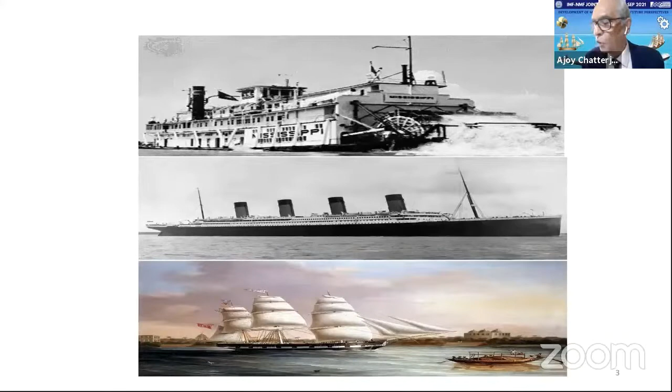In 1912, a much larger ocean ship, the Selandia, was launched. The performance of diesel engines was progressively improved. The comparison of thermal efficiency of these early engines with current operation, when thermal efficiency has risen to values approaching 55% for slow speed engines. The use of heavy fuel first started after the Second World War for use in marine diesel engines and it has become the standard fuel for the majority of seagoing ships today. There are advantages and disadvantages, obviously, of burning heavy fuel.

So, recently, local and international legislation has begun to be formulated, and the focus is moving to more expensive, lighter marine fuels and the use of dual fuel engines. With these engines, different grades of fuel are burned depending upon the prevailing requirements within the emission zones. In recent years, increasing oil prices have prompted interest in alternative propulsion options, changes in fuels for merchant ships. Typical of these have been the burning of LNG in reciprocating engines, wind-assisted propulsion, ducted propellers, energy-saving appendages, and interest in nuclear power as well.

Today, the steam turbine has largely given way to the diesel engine. This transition happened relatively quickly and coincided with the breakthrough of turbocharging and heavy fuel burning in slow-speed diesel engines, which gave these engines both power and the fuel economy to become more efficient than steam turbine propulsion. Consequently, steam turbines are normally only found today in nuclear-powered ships and submarines, as well as some LNG ships. Although in this latter case, they are also giving way to reciprocating machinery.

In the merchant shipping sector, the general demise of steam plant has in turn led to a shortage of steam plant operators. Developments with cruise technology have led to the use of diesel-electric propulsion arrangements. This is due to the efforts to achieve low noise and vibration signatures, similar to steam turbine ships, combined with enhanced operational efficiency that is achievable with this mode of propulsion by utilizing trade-offs between propulsion and hotel loading.

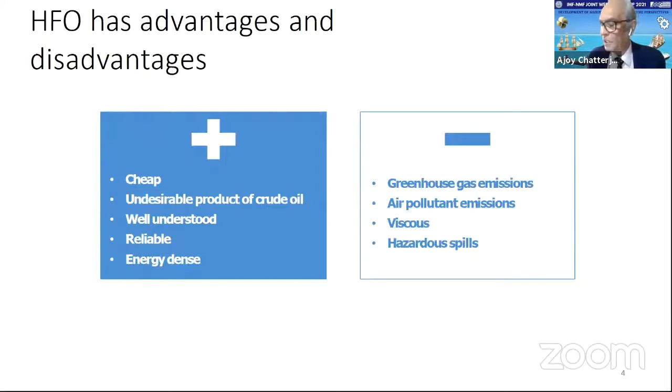Sir, just one second, sir. I think because you're turning your head, probably that is why the audio is going up and down. So maybe if you can just face the screen, that may be better for the audio if you can manage that, sir. Yeah. Can you hear now? Like, we can hear you when you're facing the screen, but when you're turning your head to the side, that is the time the audio is affected. I'll try to do it better this time.

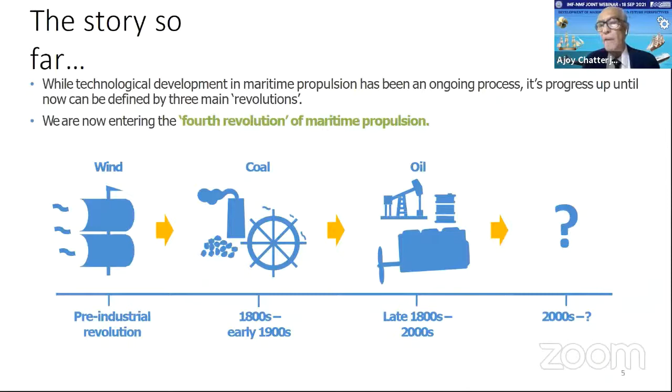So what are the short-term options? Shipping is vital to the world economy. It is a critical part of international import-export markets and supports the global distribution of goods. As for all industries, concerns about climate change require the reduction of greenhouse gas emissions from the shipping sector. This entails higher fuel prices for lower sulfur fuels.

The diesel engine is currently the most widespread of marine prime movers. It is a well understood technology and a reliable form of marine propulsion and auxiliary power generation, with engine manufacturers' well established repair and spare parts networks around the world.

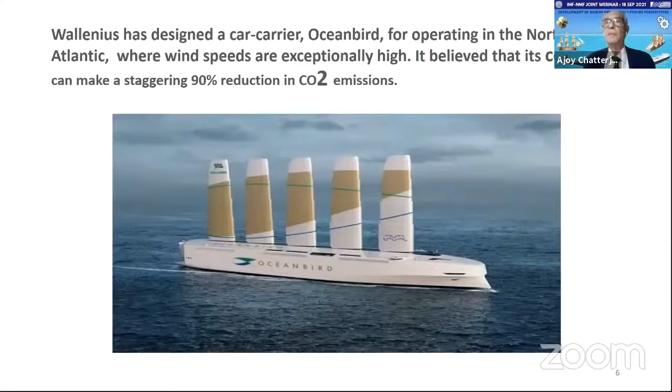So what has IMO done? What must ships do? The mandatory requirements. IMO has agreed to include a new chapter on energy efficiency in MARPOL Annex 6 and adopted mandatory energy efficiency regulations for ships called the Energy Efficiency Design Index, attained EEDI, for new ships, including a Ship Energy Efficiency Management Plan, known as SEEMP, for all ships.

In 2016, IMO adopted the mandatory IMO data collection system, DCS, for ships to collect and report fuel oil consumption data for ships over 5,000 gross tons. The first calendar year data collection was completed in 2019 and submitted to the respective administrations. In 2020, the IMO 0.5% sulfur limit entered into force, cutting total sulfur oxide emissions from shipping by over 75%.

In June 2021, IMO adopted a short-term measure to reduce the carbon intensity of all ships by 40% by 2030 compared to 2008, rather ambitious however. They do this by requiring all ships now to calculate the Energy Efficiency Existing Ship Index, known as EEXI, and to establish their annual operational Carbon Intensity Indicator, CII, rating. In other words, ships get a rating of their energy efficiency, A, B, C, D, or E, where A is the best. A ship running on a low carbon fuel clearly gets a higher rating than one running on fossil fuels.

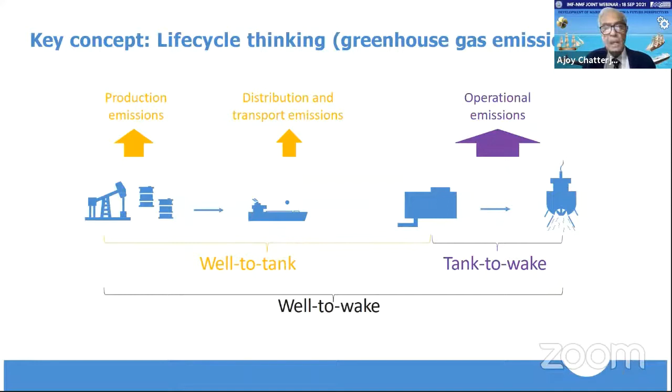Liquefied natural gas can be used in reciprocating engines, and it is a known technology, with classification society rules and fuel systems already in existence. Service experience with dual fuel and converted diesel engines, although limited at present, has been satisfactory, and currently LNG is considered cheaper than conventional fuels. LNG, while not free from harmful emissions, has benefits in terms of carbon dioxide, NOx, and SOx emissions, given that methane slip is avoided during combustion and fuel processes.

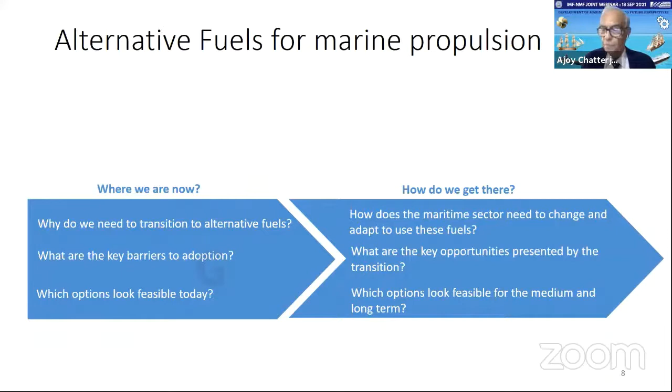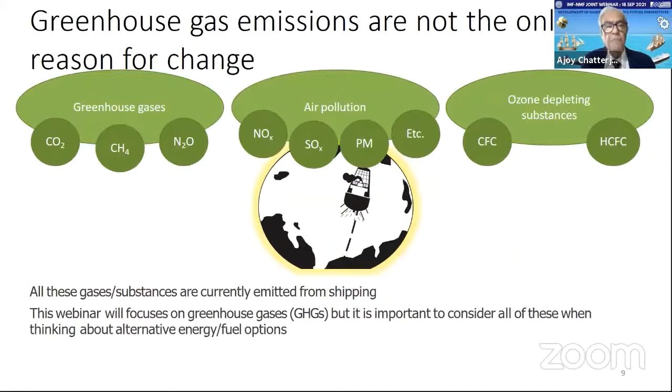The alternatives being very seriously considered are LNG, of course, LPG, methanol, biofuels, batteries, hydrogen, and ammonia. All these fuels or energy sources have a case for being an alternative option for shipping. Other options are ethanol, whose feedstock is already arranged for road transport, e-diesels, though high cost, and nuclear, which of course has its own political challenges that limit its applicability.

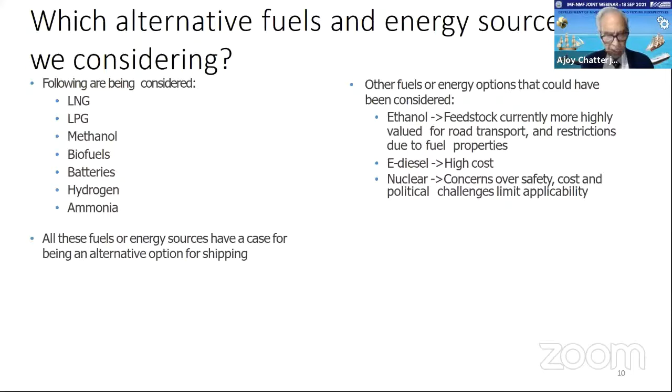Biofuels are potential medium-term alternatives to conventional fuels for diesel engines. Dimethyl ether shows some potential as an alternative fuel. However, there are presently disadvantages which need resolution in terms of lubricity and corrosion, together with creation of sufficient production and supply networks.

Fuel cells offer potential for ship propulsion, with good experience gained in auxiliary power propulsion machinery. While hydrogen is the easiest fuel to use in a fuel cell, this would require a worldwide infrastructure to develop for supply to ships.

The conventional method of design, planning, building and operation of merchant ships would, however, need a complete overhaul in case you go for nuclear propulsion, particularly in case of PWR designs. Issues also need to be addressed in terms of international regulation, public perception, acceptability, financing the initial cost, training and retention of crew, setting up and maintenance of global infrastructure, support systems, insurance, nuclear energy, and emergency response plans for ports.

Battery technology is developing rapidly, offering some potential for propulsion. However, full ship battery propulsion requires full technical development and is likely to be confined to relatively small ships. Nevertheless, battery-based propulsion would be beneficial due to producing no CO2, NOx, SOx, volatile organic compounds, or particulate matter. They may also offer a potential hybrid solution in conjunction with other modes of propulsion.

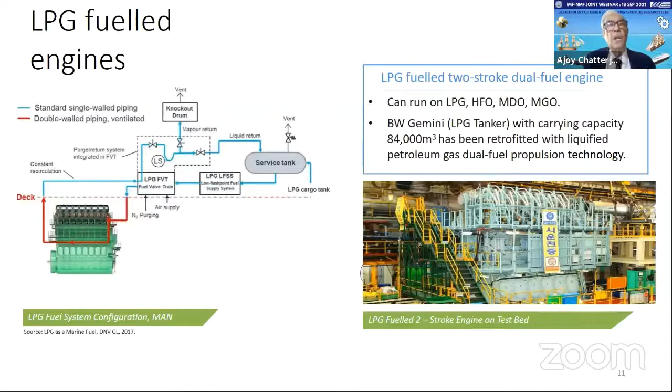Hydrogen, compressed air, and liquid nitrogen are likely to be long-term propulsion considerations. While the other options are energy storage media, hydrogen is a fuel which generates no CO2 or SOx emissions to the atmosphere and would use land-based sources of power for its production. It would need a supply infrastructure and distribution networks to be viable in a marine context, but is ideal for use in fuel cells.

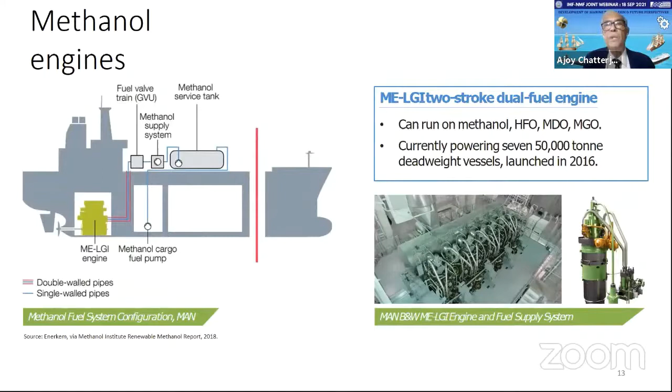Here we have LPG-fuelled ships which are already in place, and methanol ships. As you can see, very little change is required between methanol ships and ammonia ships. The same ships can run on dual fuel, HFO included. And these are the diagrams, as you can see. There are a lot of safety issues, but the engineering aspect is very good in the sense of double wall pipes, single wall pipes, and a complete inert atmosphere wherever the gas is present.

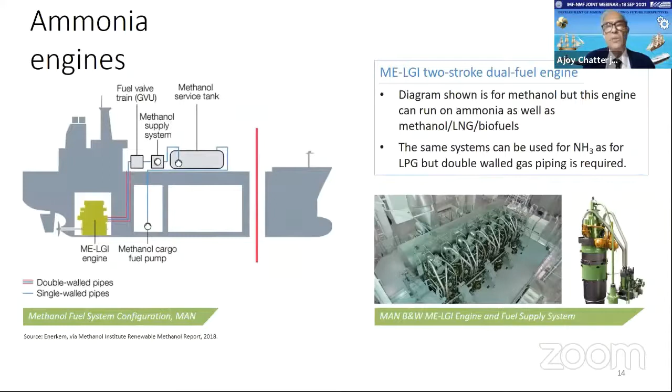Ideally, an existing less efficient ship should be replaced with a new ship with superior environmental performance, satisfying the most stringent phase of the EEDI requirement. However, it is not realistic to impose a legal obligation on ship owners to replace ships, because fleet replacement will be decided based on each company's economic circumstances and business strategy. Instead, fuel changes, retrofitting, or installation of additional energy-saving devices could also be an option to improve ships' performance. Depending on supply capacity and availability of alternative fuels, fuel change could be a feasible option.

For example, biodiesels or electro-LNG may be supplied to current diesel-propelled ships or LNG-propelled ships, respectively, without substantial conversion in ships' propulsion systems. Besides, retrofitting to improve cargo capacity or installation of energy-saving devices such as optimally designed propellers will result in further efficiency improvement. I'm sure some of the speakers are going to speak on this issue in further detail.

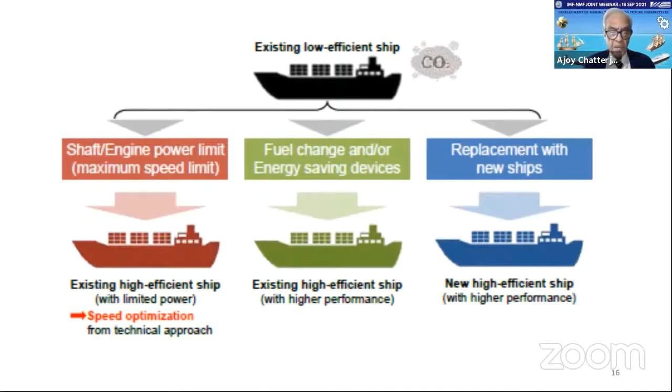There is also a need for further soundly based techno-economic studies on target emissions from ships. LNG as a marine fuel has been identified by industry as the likely bridging fuel, with one of the key reasons being the fact that the necessary bunkering infrastructure has been developed considerably over the past few years. LNG's case as a legitimate stepping stone to meet emission targets is supported by port facility investment. Even though LNG is not an ideal zero emission solution, it is virtually sulfur-free and can reduce particulate and NOx emissions.

Why do we need alternative ways of reducing emissions? What are the alternative ways? If you look at this diagram, which is very popular now at IMO, it is available in various programs. You keep seeing this diagram, but I would like to show it here because in a nutshell, it gives you the message that GHG targets cannot be met without alternative fuels and energy sources that offer deep GHG emission savings compared to current fuels. So the green circles are the ways of efficiency improvement. You can see the percentage, including voyage optimization, speed, extensive speed optimization, hull and superstructure, energy management.

And the yellow circles are the ways of using fuel. I mean, different types of fuel, whether it's electric, bioenergy, third generation fuel, hydrogen, and other synthetic fuels.

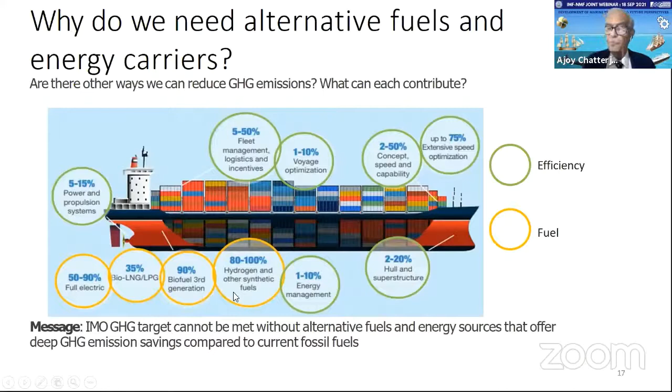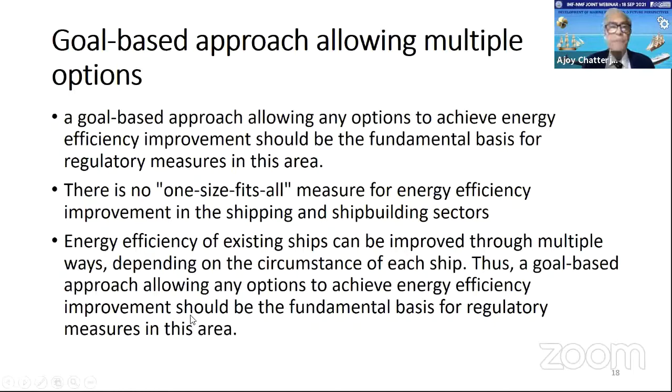The goal-based approach allows multiple options. The goal-based approach allowing any option to achieve energy efficiency should be the fundamental basis for regulatory measures in this area. There is no one-size-fits-all measure for energy efficiency improvement in the shipping and shipbuilding sectors. Energy efficiency of existing ships can be improved through multiple ways depending on the circumstances of each ship. Thus, a goal-based approach allowing any option for energy efficiency improvement should be the fundamental basis for regulatory measures.

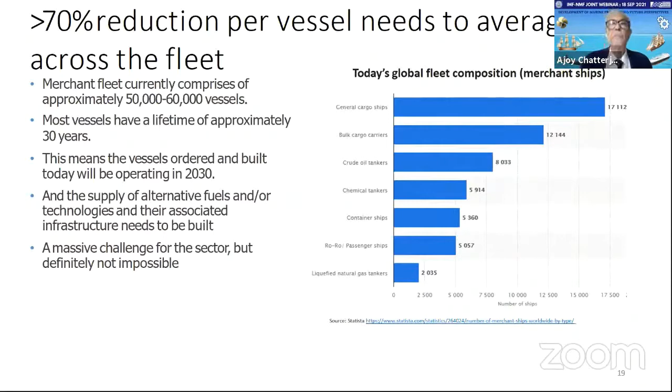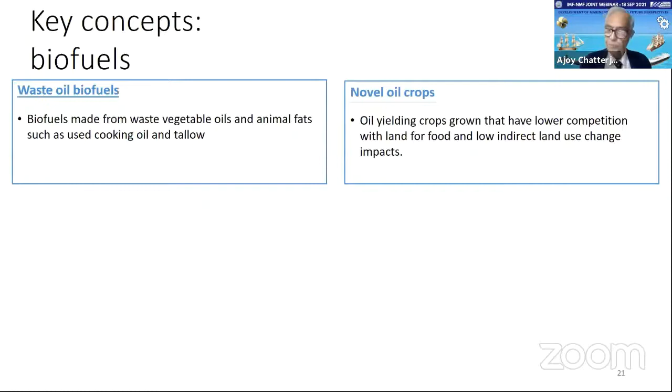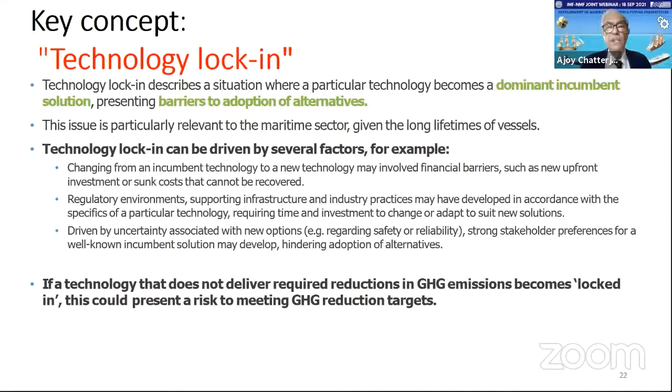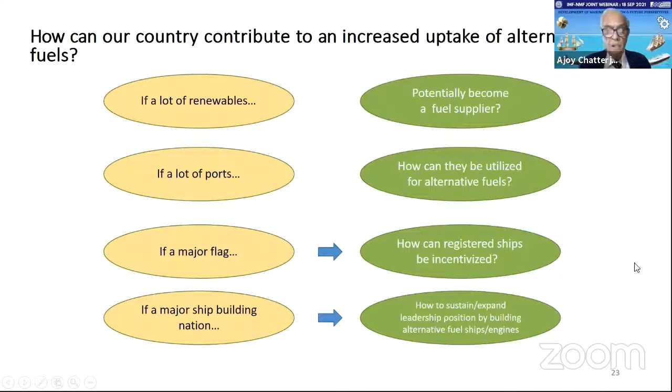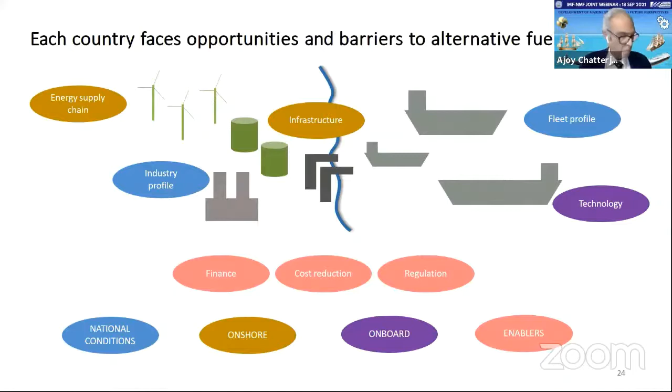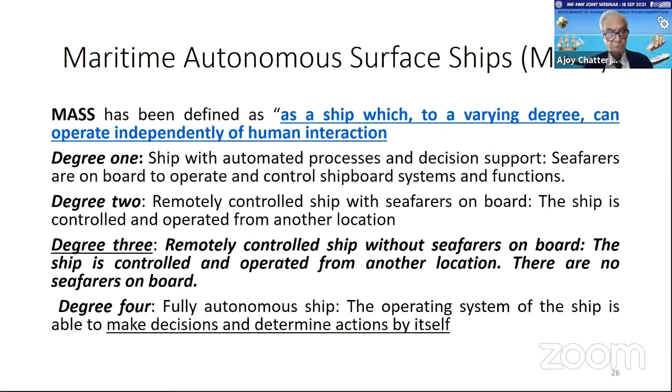Now, I would like to stop sharing. How do I do that?

Yeah. In my address, you may have realized that I have touched upon key points in the past, current, and future developments in marine propulsion that are closely linked to energy efficiency and prevention of marine pollution. I'm sure that the expert knowledge, opinions, and ideas expressed at this forum by the distinguished speakers at this webinar today will give a fascinating insight into the development of ship propulsion systems and operation of ships now and in the near future. It is hoped that the discussion will set out how we got to the current technological solutions and examine a wide range of possibilities for future ship propulsion and operating options, keeping in mind sustainable measures for energy efficiency in ship propulsion and prevention of marine pollution.

That ends my keynote address. I hope I have been able to key in what is required for this distinguished gathering of experts to further discuss and deliberate. Thank you very much.